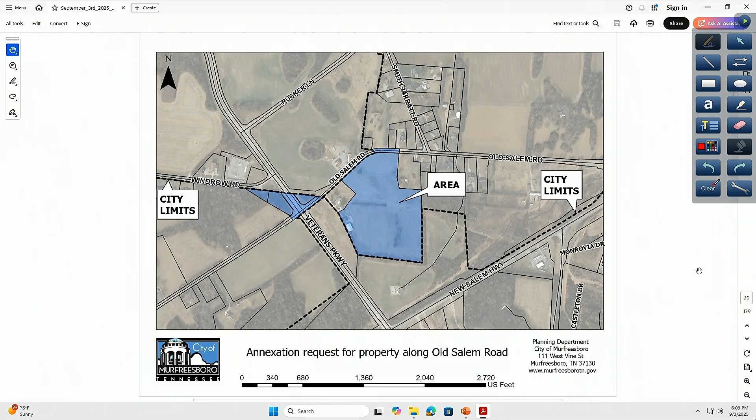Staff has been working with other city departments to draft a plan of service, which has been included in your packet. Due to its close proximity to the city limits, it's going to be relatively easy for the city to extend services upon annexation, with the lone exception being sanitary sewer, which the property owners will have to work with neighboring properties, particularly the Robinsons, to extend sewer to the north to their property. There's no current timeline for that extension to take place, and that extension will be the responsibility of the developer to complete.

Staff is supportive of the annexation request for the following reasons: the subject property is contiguous with the existing city limits, it is located within the city's urban growth boundary and within the service infill area, and services can be extended to the subject property upon annexation.

The Planning Commission will need to conduct a public hearing on this matter, after which it will need to formulate a recommendation for City Council. I'm happy to answer any questions, and Rob Mulchan, who is representing the applicant, is here as well.

Does the Commission have any questions for Mr. Donovan or Mr. Mulchan? If not, we'll open up the public hearing. Just to clarify for folks here for this application, the following application is the actual plan development, talking about the development itself. This hearing is with respects to just the annexation. So anyone that would like to come and speak with respects to the annexation application, please come forward.

Seeing no one, we'll close that public hearing, and any questions or comments from the Planning Commission or motions.

Move for approval, subject to staff comments. Second the motion. Roll call: Vice Chair Ava Water, aye. Mr. Carroll, aye. Mr. Harris, aye. Mr. Prince, aye. Mr. Rollins, aye. Mr. Wright, aye. Chair Halliburton, aye. Next item on the agenda is a zoning application for approximately 19.26 acres located along Old Salem Road to be rezoned PRD, Robinson Bend PRD, simultaneous with annexation.

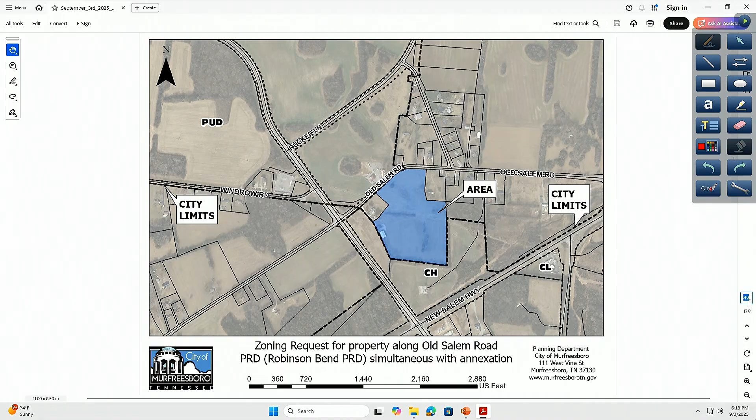As far as the Robinson Bend PRD itself, let me get to a layout page. The PRD proposes 83 total units: 52 single-family detached and 31 attached. The single-family detached product will be on a minimum 6,000 square foot lot, minimum 50 feet wide. Both the detached and attached homes will feature either one or two-story designs with front porches, rear patios, and two-car garages on each.

The detached homes will have a minimum of a 1,400 square foot floor footprint, and the attached homes will be a minimum of 1,200 square feet for each of those additional.

The current access for the subdivision is off of Old Salem, but there are 3 additional access points going in each of the other cardinal directions to provide access as those properties develop to neighboring properties.

The PRD itself includes several amenities. There's some open play areas in this area, as well as a soccer field and open play in the northern section. You have the mail kiosk that provides approximately 10 parking spaces adjacent to one of those open space areas. On the attached home lots, there are 10 spaces to the north, and then 6 additional spaces to the south now that have been added since this was last seen.

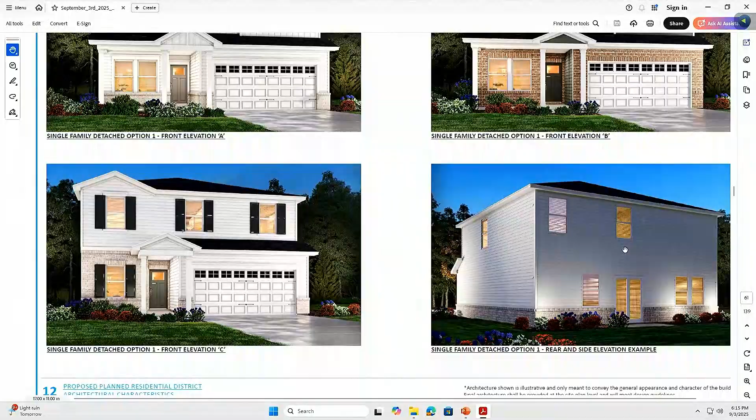As far as architecture goes of attached and single family, there are quite a few options in the pattern book that I'll scroll through so you can see. Mr. Mulchan will have an update for you on the architecture.

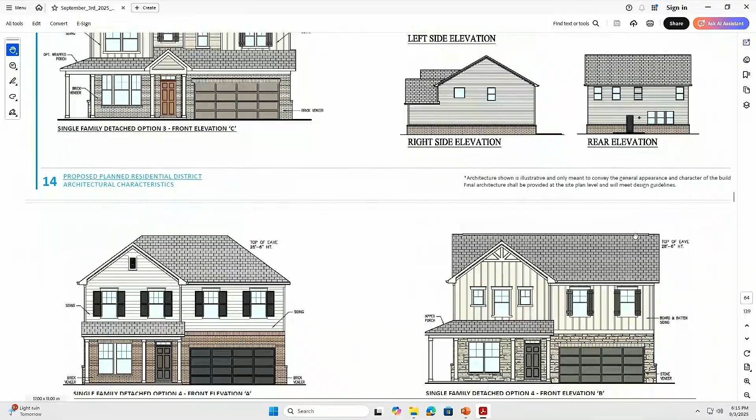What they are committed to in the verbiage of the pattern book is a 30 to 36 inch water table that'll be either brick or stone, and then Hardie above that. That is a 4-sided material standard that'll extend to all 4 sides of both the attached and the detached products.

So here's some examples of the detached product, and then the attached product here. As I mentioned, Mr. Mulchan will have an update regarding this as well.

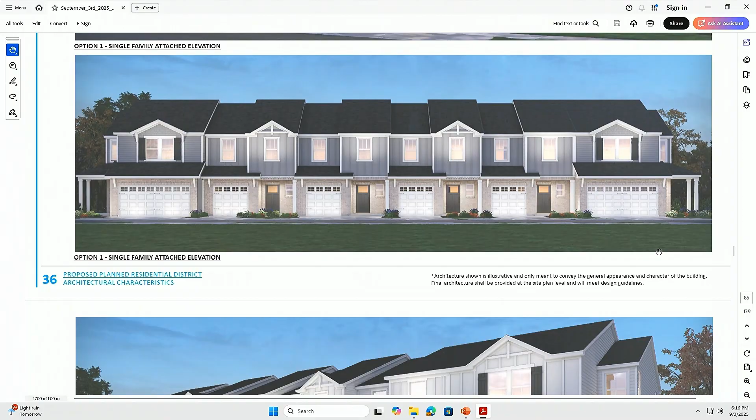Some additional items of note: there's a type A buffer bordering this residential in the county, and a type A buffer that will back the attached product to that commercial lot, and a type D, which will back that single-family residential structure that is in the notch on the property.

In your staff report, there's a note where public infrastructure was requesting a left turn lane into the site to accommodate traffic from Old Salem Road. Initial plans had shown that, and staff has requested that be added back to the pattern book. However, it hasn't been included yet, but there have been some discussions with staff that I'll let Mr. Mulchan explain to the Planning Commission regarding the plan for that.

So we do have a plan in place that I'll let him explain further. Exceptions to the PRD: there is one exception, related to parking of the attached product. They are only providing a portion of the parking in the driveway for the attached product. The PRD itself does include provisions to limit the garage spaces to parking only, no storage, and they will meet the size requirements present in our zoning ordinance.

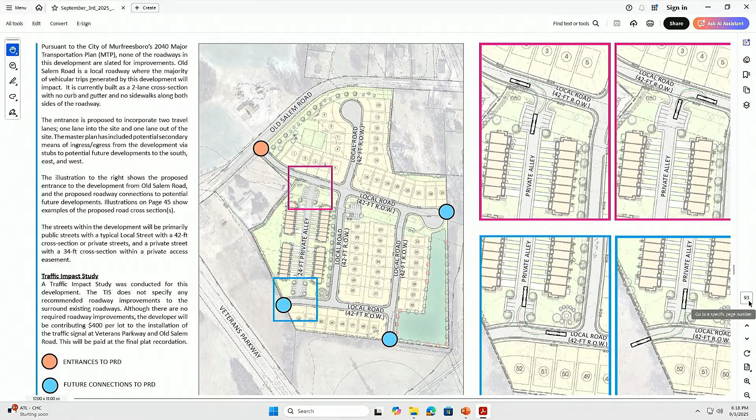That's a maximum of 20% of the overall acreage consisting of those attached units, and a maximum of 40% of the total number of units being that attached product. The proposed PRD meets the criteria for the AUR designation in both the density and the attached unit criteria. So the AUR designation is consistent with, or the rezoning request is consistent with, the land use plan or land use map for this area.

Staff is supportive of the rezoning request because it is consistent with the future land use map designation of AUR and provides a mixture of single-family attached and detached homes. The proposed PRD is compatible with surrounding residential and commercial areas by providing a balanced mix of housing types and landscape buffers that create a transition between nearby residential and commercial areas.

The subject property is currently underdeveloped with only 2 accessory structures and situated in an area of active residential growth, making it well positioned to complement ongoing development trends and meet housing demand. Planning Commission will need to conduct a public hearing on this item and make a recommendation to City Council. I'm here to answer any questions, and Mr. Mulchan also has a presentation for the Planning Commission.

Any questions for Mr. Donovan at this point? Yeah, I have a question.

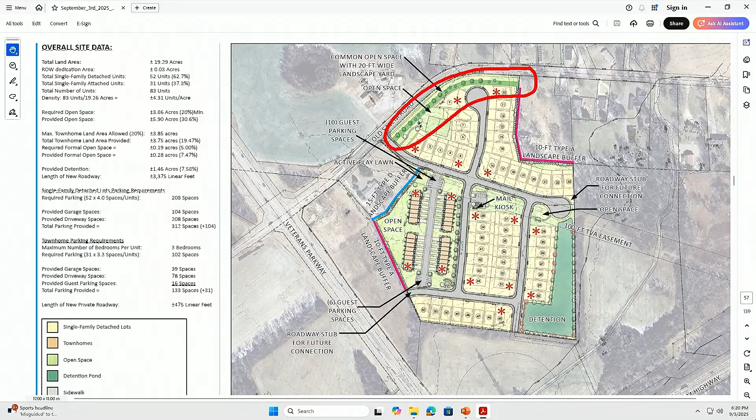Okay. Any other questions before Mr. Mulchan makes his presentation? Thank you.

Good evening, Chairman, members of the Planning Commission, Rob Mulchan from SEC. I'm here tonight on behalf of Summit Development to present to you Robinson Bend, a request for annexation in PRD zoning.

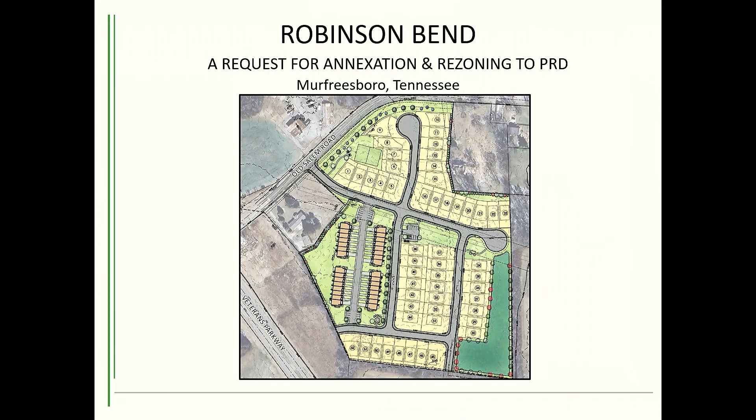You can see the site here located along the southern edge of Old Salem Road, to the east of Veterans Parkway and to the north of New Salem Highway. It's a very heavily congested area in regards to a lot of infrastructure for this development to take place.

As we talked about, the zoning on the property currently is RM in the county. We're requesting PRD. As you can see in the zoning map, the southern and western portions of the property are lined by commercial highway zoning here in the city. There's a little fragment to the west that's the existing home still in the county under RM zoning. To the east and north is also RM zoning in the county, and to the northwest is the PUD zoning for the Marymount Springs zoning classification.

As we talked about during Richard's presentation, this property is designated as AUR, or Auto Urban Residential. We're proposing the development tonight to stick in line with those criteria, as you heard from Mr. Donovan, and also in regards to the following presentation.

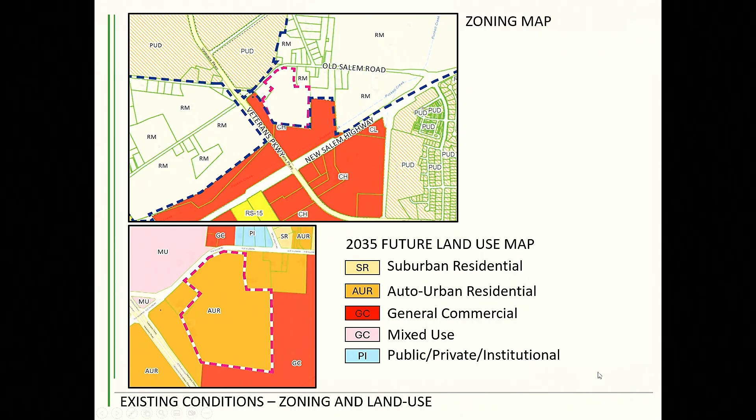A couple pictures really quick to show you the existing character of the property. This is a view looking from Old Salem to the south, so you can see the existing farmland with the TVA tower that crosses through the property in the background, and further back you can see the cell tower on the adjacent property to the south of us.

This is a view looking back towards Old Salem across that same farm field from the other side of this TVA tower. This picture is the house to the west that's still in the RM zoning along Old Salem. This is the house to the east of our property along Old Salem. This is a view looking along the Old Salem roadway as you're heading eastbound, away from our property.

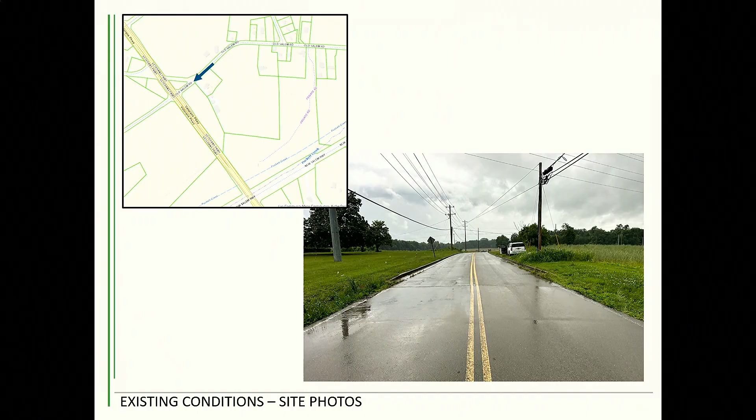And this is the view looking westbound back towards the Veterans Parkway intersection, where you can see the extent of the existing roadway built with Veterans Parkway, the curb and gutter section leading up to our property line, which falls about 10 to 15 feet short of the property.

The project being proposed tonight is a PRD. We're looking for a total of 83 dwelling units - 52 single-family detached lots and 31 single-family attached townhomes on 19 acres. So you're looking at a little over 4.3 units to the acre, which is in line with the AUR designation for the property.

Open space, we're required 20%. We're actually exceeding that, making it almost 30% open space across the property.

As you can see in the actual concept plan, we have one point of access to Old Salem, then coming into the property and following the TVA easement, we come across the property. We have three points of egress, as Mr. Donovan talked about - one to the west to the CH property, one to the south to that CH property, and another one to the east. So we're covering all four boundaries of our property in regards to access, whether today or tomorrow.

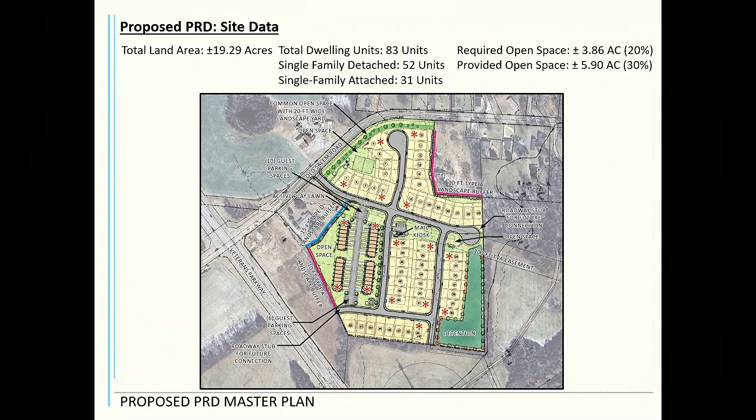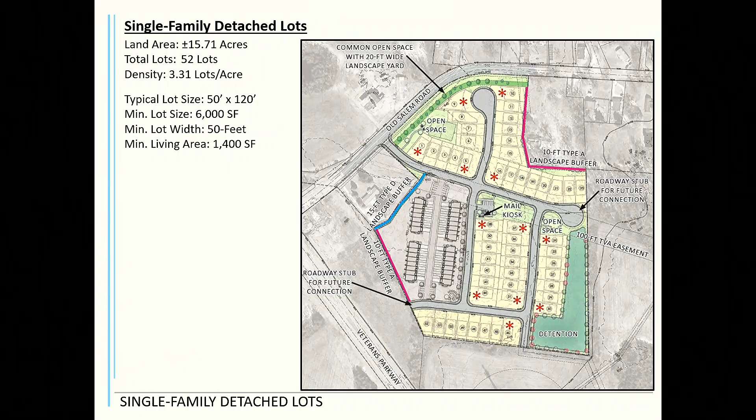Mr. Donovan was talking about some of the architectural character. We do have a pretty good smattering of homes presented in the booklet, and we've been asked by staff to trim that back. So the representative images you see in this section tonight will be the images shown in your pattern book on pages 36 and 37.

This is the single-family detached product. Sticking with our requirements outlined in the pattern book, we've made at least a minimum of a 30 to 36-inch high brick or stone water table with hardy board above that on all 4 sides of the buildings. Of course, those brick and stone materials could go up in percentage, as you can see in these diagrams. So these are the elevations on those pages that we want you to consider in regard to the architectural characteristics for the single-family detached.

Next is the single-family attached townhome section. This again is under the 20% threshold for the AUR. We're looking at 31 units on 3 acres, so a little over 8.6 units to the acre for the townhome section. These would be sold as HPR, horizontal property regime. Minimum square footage for these would be 1,200 square feet, with a minimum of 2 bedrooms and maximum of 3 bedrooms.

We'll also be requesting an exception for the townhome section regarding limiting the garages to vehicular use only. Those will be restricted in the covenants for those townhomes so that we can appropriately get enough maximum parking to meet our requirements for parking on the development itself.

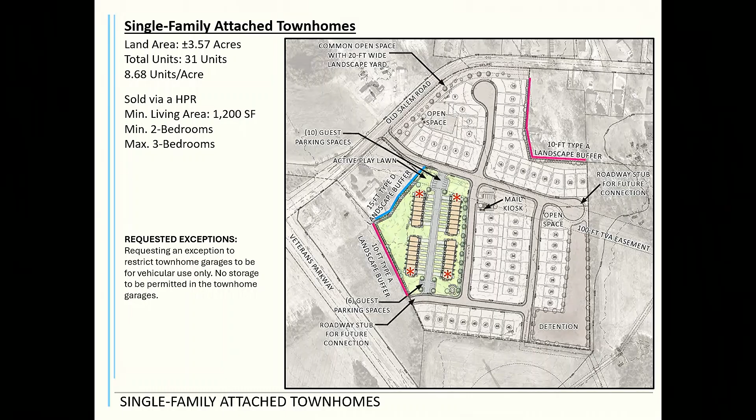These are some of the representative elements in the townhome section of the booklet. These are the elevations we would ask you to consider for passage of this to City Council. Any pages that represent architecture outside of those pages would then be ripped out of the book before we get to City Council. So what you guys are approving tonight is what would go to council moving forward.

Question: on that picture, are some of these just single-car garages? Yes, the interior units are single-car garages, the exterior are two-car garages. That's why we're asking for the exception to restrict the garages to vehicular use only, so we can maintain meeting the parking requirements for each unit across the development.

Again, starting off with a minimum 30 to 36-inch water table, hardy board above that, the percentages of masonry material, the brick and stone, can go above and beyond that.

As talked about, we do have one point of main ingress today. We've got 3 points for future attachment in future developments. We were asked at the last planning commission to show that the standard fire truck for the city could make those turns into the development, on the private side where the private alley and private street along the townhomes provide access for the townhomes. Those diagrams are represented in that corner.

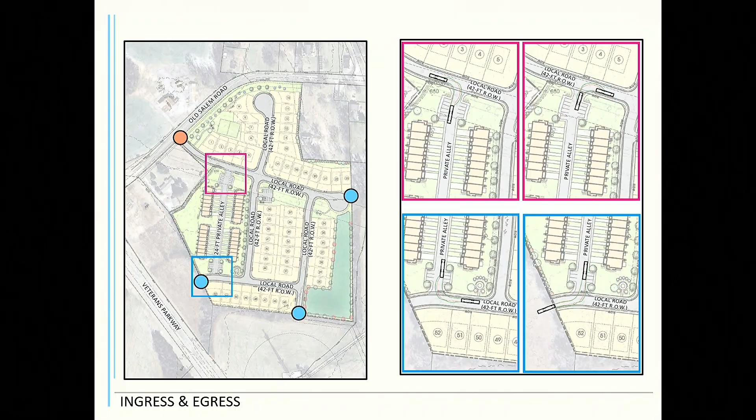For open space, we've got well over the 20% minimum requirement, with various spaces throughout. The upper quadrant has a soccer field and some seating areas. Underneath the TVA easement, we've got plenty of area for open activity lawns. On the right-hand side we've got a little seating area incorporated, and down in this bottom corner a little pocket park with a fire area as well.

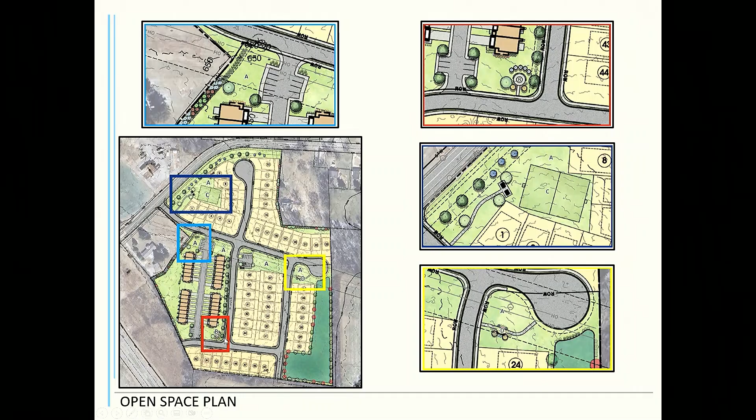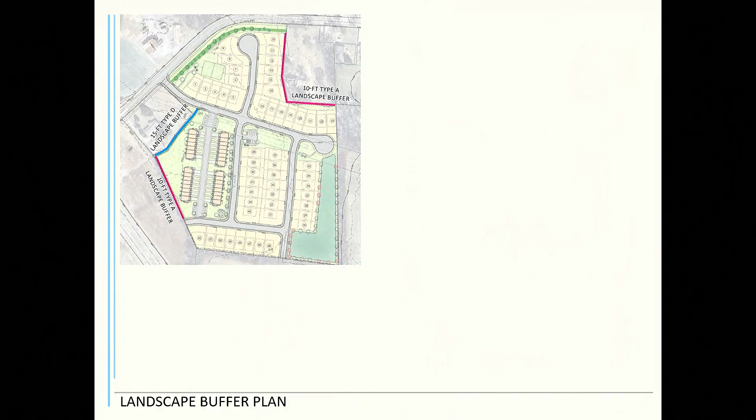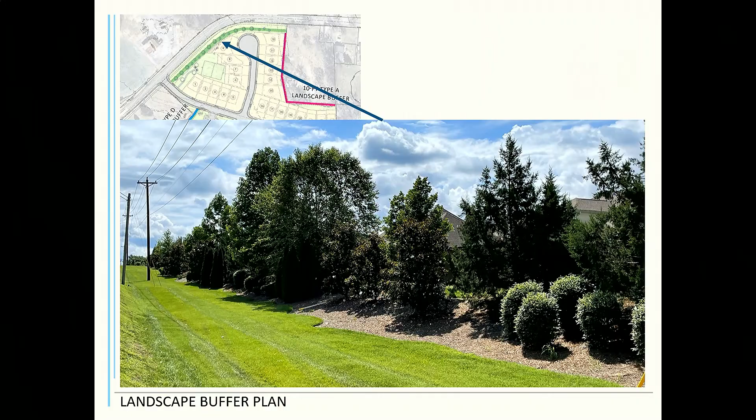As part of the development package, we're looking at creating a good aesthetic front door to the project, with a 20-foot landscape yard. This gives you the picture on the screen, also incorporated in your book, showing what we want that front appearance to look like, with mounding, a variety of plant species including canopy trees, understory trees, evergreen trees, and shrubs, to make a good looking front door presence and separate the proposed homes along the roadway, creating a clean, green look along the frontage as you drive down Old Salem Road.

With that being said, I'm available if you have questions now or after the public hearing, and I appreciate your time and consideration of this.

Any questions for Mr. Mulchin?

On the single car garages, are they deep enough to park two cars bumper to bumper? Yes, two cars in the driveway and one car in the garage.

Is there any buffer behind lots 45 through 52 on the south side, on the backyards? I'm assuming the backyards will be facing Veterans, correct? Those backyards are facing south towards the Veterans and 99 intersection, but they are separated by the adjacent property owner, which is the Foundation's property down there. So there is a pretty good distance between the back of those homes and those existing roadways. That property is zoned CH, so we don't know what the end user would end up being at some point. But based on typical zoning, we're not required to have a buffer between single-family detached and commercial highway. Commercial highway would be providing the buffer between those uses in the future and these single-family detached units.

Any other questions for Mr. Mulchin before we open the public hearing?

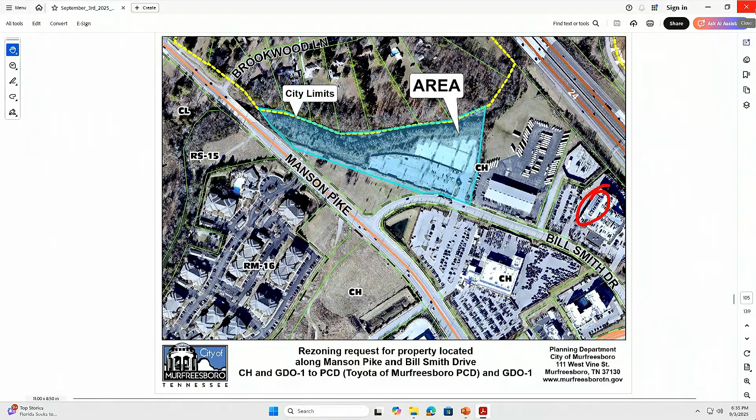Since you previously reviewed this application on August 20th, there have been two exceptions added. The first is so that the building's architecture would not be required to meet 35% void space on the exterior elevations. The second would be to reduce the 10-foot space between edge of drive aisles and building down to 5 feet. 5 feet is our minimum base of building planting area, while 10 feet is generally required between drive aisles and the building. So those two exceptions have been added.

Future land use for this area identifies this parcel as general commercial, which is consistent with this request before you tonight. Staff is supportive of this zoning request for the following reasons: the proposed commercial use and zoning is consistent with the commercial development pattern and zoning along Bill Smith Drive. The proposed structure is approximately 300 feet away from the nearest property used for residential purposes, providing a substantial separation and buffer to mitigate any potential negative impacts. The request is consistent with the recommendations of the Murfreesboro 2035 Comprehensive Plan.

The Planning Commission will need to conduct a public hearing tonight prior to formulating a recommendation to the City Council. I'm available if there are questions, and Mr. Brian Grover from SEC is also available to field any questions you may have for him.

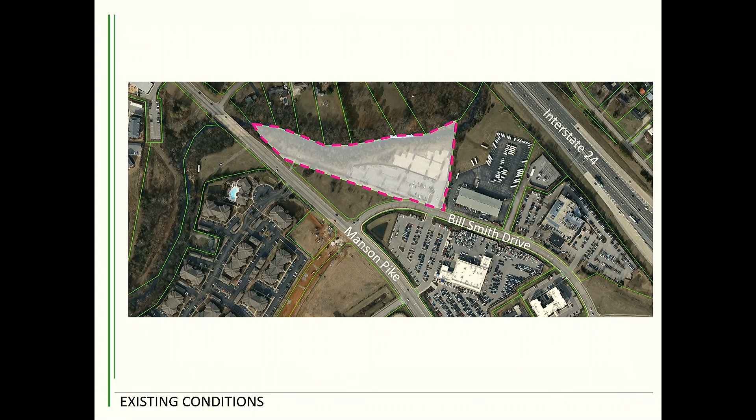As the site sits today, it's currently used for excess inventory, is approximately 7.5 acres in size, and is currently zoned commercial highway. Similar properties to the east and south are also zoned commercial, with residential properties to the west across Manson Pike and to the north within the limits of Rutherford County.

The future land use plan sees this as general commercial. That entails a higher intensity of commercial business with access to arterial roadways, as well as including land uses such as auto-related services, which you will see match quite closely to the proposed PCD.

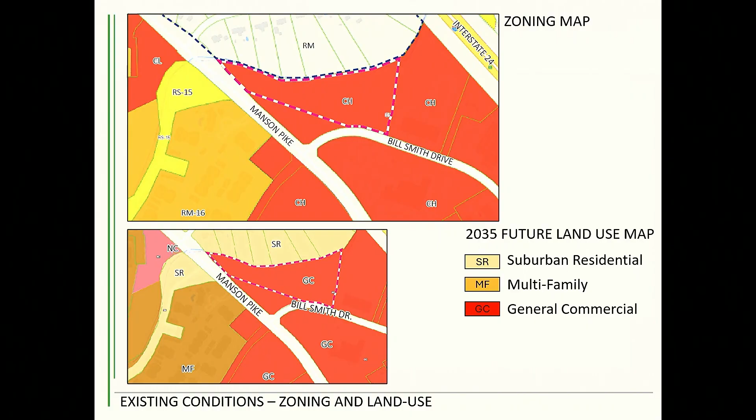When it comes to the surrounding area, primarily it's commercial with some heavier multifamily residential to the southwest. I would say that when it comes to the most conflicting land use, it would be to the north in Rutherford County with those single-family homes. However, thankfully there's that natural barrier of Overall Creek right there and quite a distance of natural woodlands around that stream to help provide a natural barrier between the two.

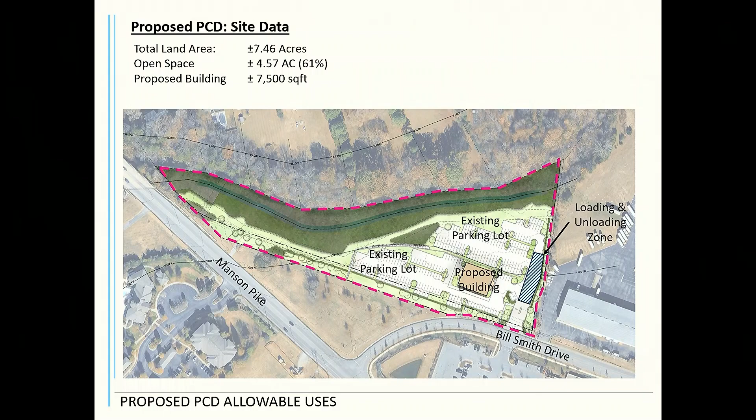I won't go over all the development standards, but there were some similarities between this and a previous PCD you saw come through with Mazda. Signage will be included along the right-of-way to the development to help mitigate or promote drivers to unload and load their deliveries on site rather than in the right-of-way, and those signs will be posted and visible from the right-of-way.

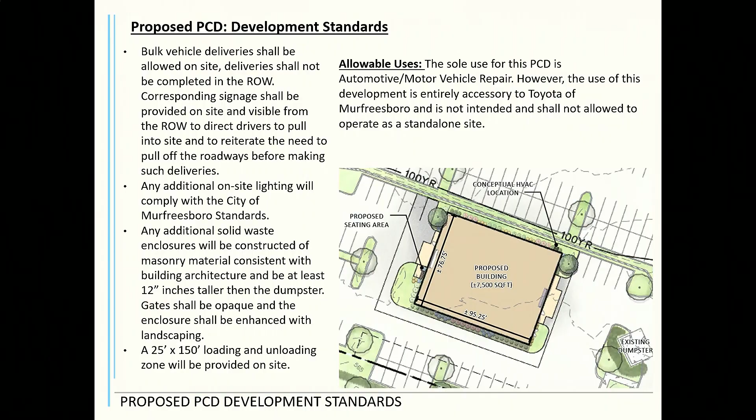Any additional on-site lighting will comply with City of Murfreesboro standards. When it comes to the allowable uses for this site, the sole use is going to be automotive motor vehicle repair, but this use is strictly accessory to Toyota of Murfreesboro and is not intended, and will not be allowed to operate as a standalone site.

The setbacks for the site actually remain the same as if it was commercial highway, so there's no change there. As stated before, the existing vegetation along that natural edge and the perimeter near Bill Smith Drive will remain unchanged. There will be some additional landscaping around the building, and if any trees were disturbed or damaged during construction, those would be replaced as well.

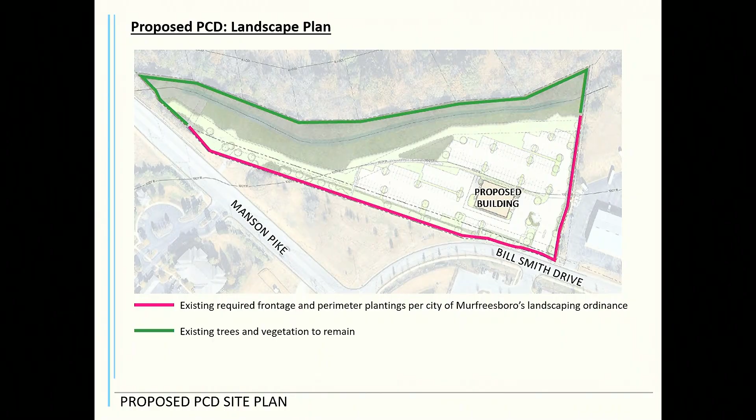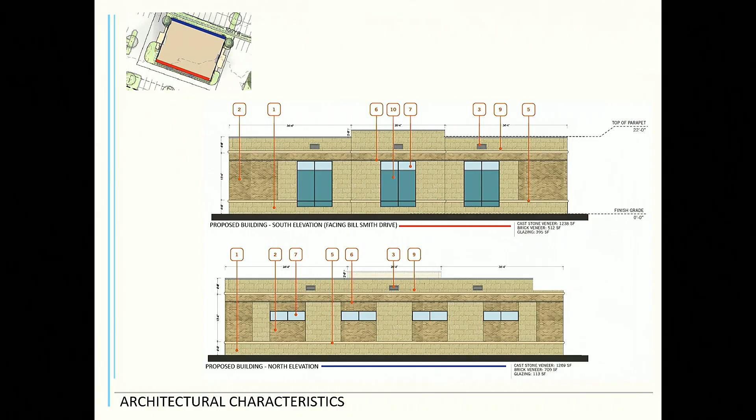The architecture, you will notice, is actually very similar to the service reception area at the existing Toyota dealership in terms of material, style, and even some of the trim. This is the elevation as seen from Bill Smith Drive on top and the northern elevation on the bottom. For the eastern and western elevations, the primary difference would be the roll-up doors, but again following suit with the existing Toyota building, these roll-up doors would primarily be transparent.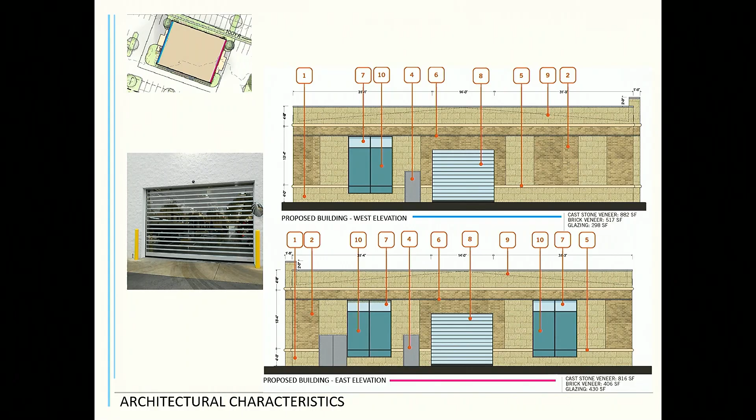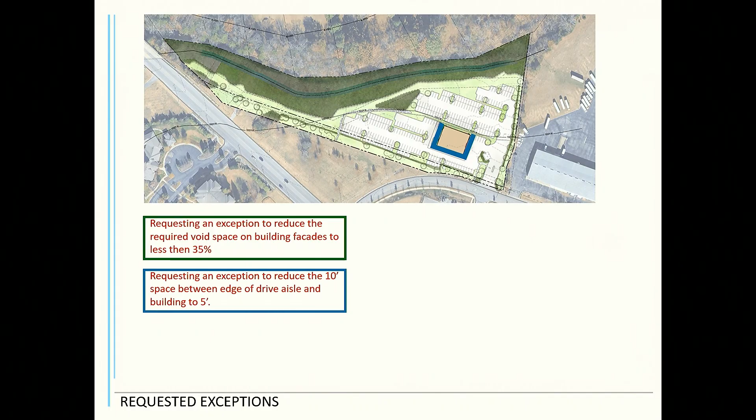There are two requested exceptions with this PCD. One being the architecture, to reduce that total void space required below the 35% threshold, as well as the reduction of the landscape area from 10 feet to 5 between the drive aisle edge and the building. Anytime a site in the GDO is over 5 acres, which doesn't happen all that often, that requirement increases from 5 to 10 feet. So with this use being as minimal and as little impact as it is, we think it would be appropriate to reduce that back down to 5 feet.

If you guys have any questions, I'd be more than happy to answer those now or after the public hearing.

Any questions from the Planning Commission?

Is the existing parking lot remaining? Yes. Okay, yeah, they'll remove a portion of it and put the building there, but the rest of the parking will remain the same.

Any other questions? Thank you very much. Thank you.

All right, we will now move and open the public hearing. Anyone wishing to speak for or against this application? Seeing no one, we will close the public hearing.

Any questions, comments, or motions from the Planning Commission? Motion to approve, subject to staff comments.

Second. Ms. Jaco? Vice Chair Averwater, aye. Mr. Carroll, aye. Mr. Harris, aye. Mr. Prince, aye. Mr. Rollins, aye. Mr. Wright, aye. Chair Halliburton, aye.

Next item on our agenda is a zoning application for approximately 0.4 acres located along East Kingwood Drive to be rezoned from RM16 to Commercial Highway. Abundant Life Christian Academy is the applicant.

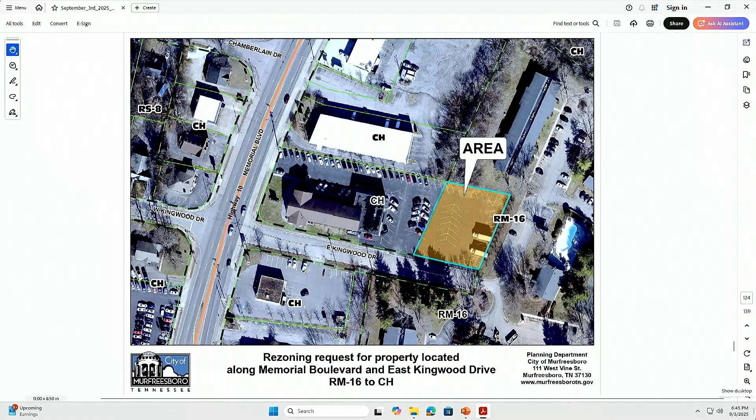In looking at our general plan land use designation for the site, it was designated as general commercial in character. So you can see here on the back portion of the site, this honeycomb area is the 0.4 acres that we're anticipating to be proposed to go from the current multifamily residential zoning district to CH.

The reason staff is supportive of this rezoning request is that the CH zone district will make the entire lot consistent with the zone district. It will help eliminate future confusion regarding whether various institutional uses are allowed on the property by right versus requiring a BZA issuance for future improvements. Most importantly, the CH zone district is consistent with our future land use map of the 2035 general plan.

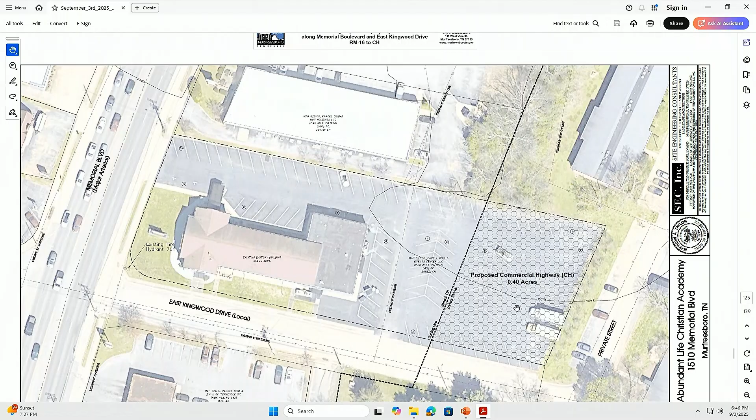For those reasons, staff recommends approval, and this is a noticed public hearing for your consideration and recommended action to the council. If you have any questions, I'm more than happy to answer them, and I believe the applicant is here.

I'm pinch hitting for Brad. It's normally in Brad's area, but I think Mr. Taylor is here representing his client. Thank you. Any questions for Ms. Smith?

Hearing none, we'll move forward with opening the public hearing. Anyone would like to speak for or against this application? Seeing no one, we will close the public hearing. Any comments, questions, or motions from the Planning Commission regarding this application?

Move for approval, subject to staff comments. Second. Ms. Jaco? Vice Chair Ava Water, aye. Mr. Carroll, aye. Mr. Harris, aye. Mr. Prince, aye. Mr. Rollins, aye. Mr. Wright, aye. Chair Halliburton, aye.

Thank you. Next on our agenda is staff reports and other business. A mandatory referral to consider the abandonment of a drainage easement located at 2612 Dorset Street. Frank Pesce is the applicant.

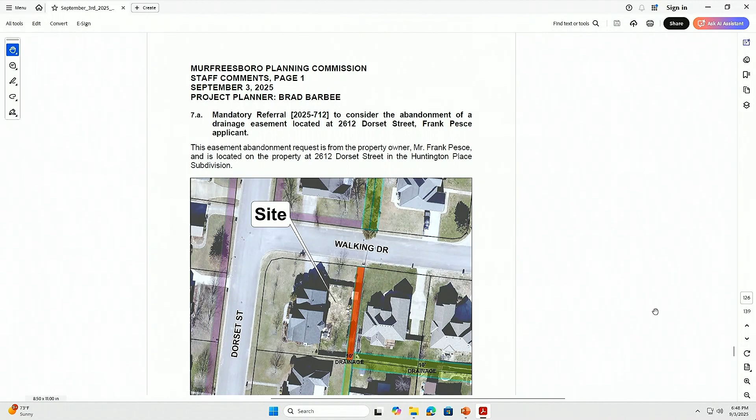Mr. Barbee: Good evening again. This next request before you is from Mr. Frank Pesce. He's the property owner of 2612 Dorset Street. He is requesting the abandonment of a drainage easement located along the eastern boundary of his property, which you can see before you in red.

This current drainage easement has been brought to the attention of our Murfreesboro Engineering Department. The Engineering Department has no objections to the proposed easement abandonment, as there is no infrastructure in that easement, and in addition, it is not being relied on for drainage currently.

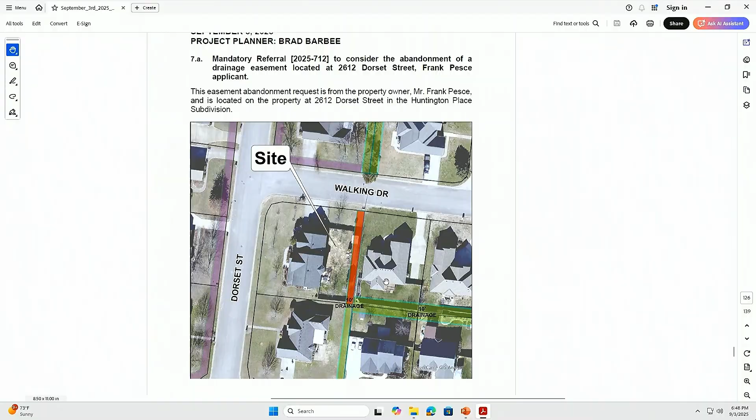Staff is supportive of this recommendation and recommends approval based on the following conditions: The applicant must provide the city legal department with all necessary documentation, including any needed legal descriptions and exhibits required to prepare and record the legal instrument or quitclaim deed. The drainage easement abandonment should be subject to final approval of the legal department or quitclaim deed by the city legal department. The applicant will be responsible for recording the legal instrument or quitclaim deed and for paying any recording fees.

The Planning Commission will need to discuss this application and make a recommendation for the City Council. If approved by the City Council, then the mayor will authorize and sign the necessary documents to convey the city's interest back to the property owner. Available if you have questions.

All right, thank you, Mr. Barbee. Any questions for Mr. Barbee? Hearing none, do we have a motion? So move, subject to all staff comments. Second. We have a motion and a second.

Ms. Jaco? Vice Chair Ava Water, aye. Mr. Carroll, aye. Mr. Harris, aye. Mr. Prince, aye. Mr. Rollins, aye. Mr. Wright, aye. Chair Halliburton, aye. Last item on our agenda is a mandatory referral to consider the dedication of electric easement on city-owned property located along Dr. Martin Luther King Jr. Boulevard.

Middle Tennessee Electric is the applicant. Mr. Shackelford, how are you doing? I'm good, thanks for the introduction, Chair Halliburton.

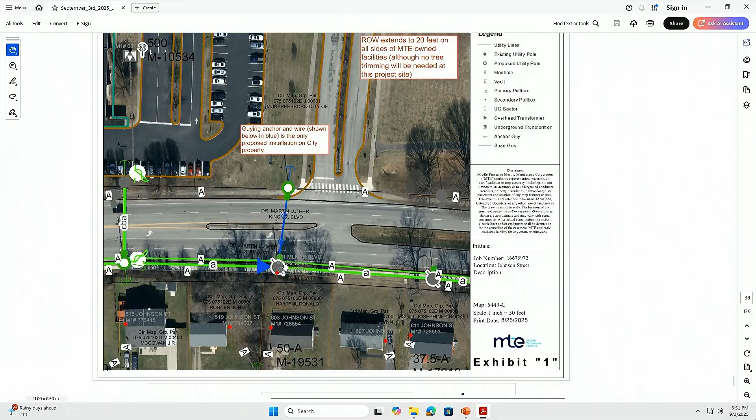Hearing none, any comments or motions associated with this application? Move for approval, subject to staff comments. Second. We have a motion and a second.

Vice Chair Ava Water, aye. Mr. Carroll, aye. Mr. Harris, aye. Mr. Prince, aye. Mr. Rollins, aye. Mr. Wright, aye. Chair Halliburton, aye. Any other business before the Planning Commission this evening?